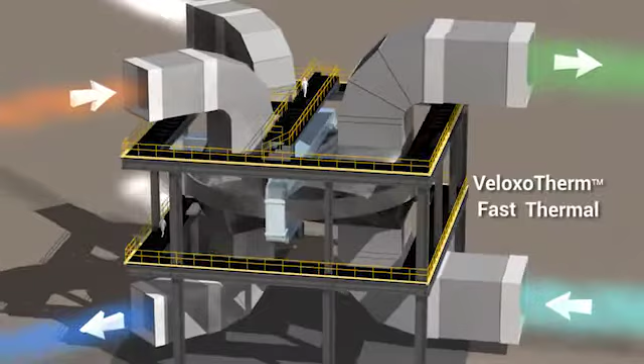Welcome to Carbon Capture in 60 Seconds, the most economically viable approach for separating CO2 from flue gas streams. The VeloxoTherm process is the world's first post-combustion CO2 capture process that uses structured adsorbents.

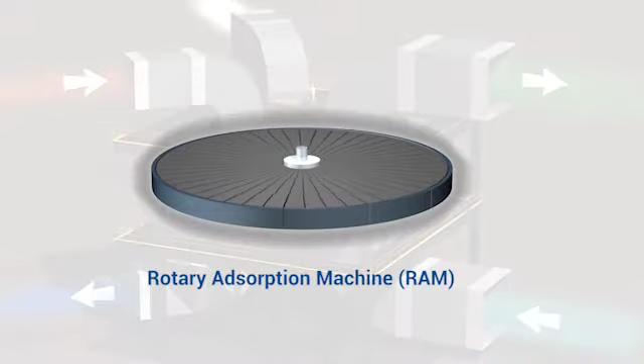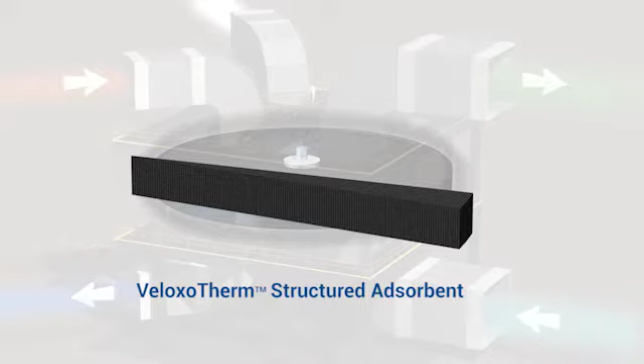At the heart of the VeloxoTherm process is the Rotary Adsorption Machine, or RAM, which functions in a similar manner to a regenerative air preheater. The RAM consists of a rotating assembly, or rotor, that contains the structured adsorbent. The rotor is divided into sectors by the rotary valve, which establishes separate flow paths for flue gas, steam, and air through each sector while minimizing gas leakage.

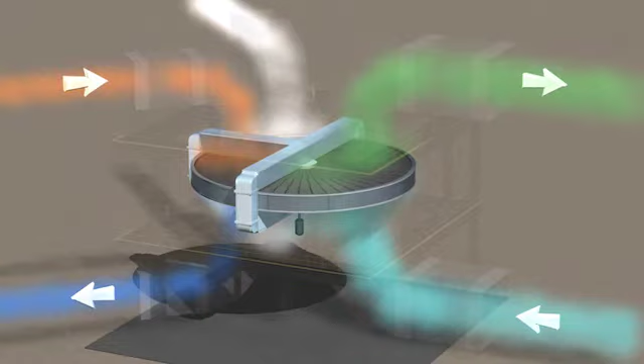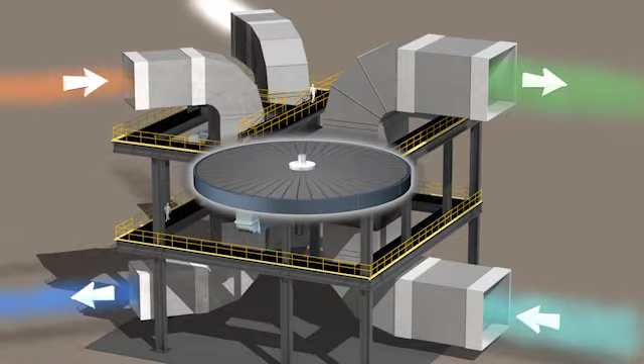The temperature swing adsorption, or TSA cycle, is established by the rotation of the structured adsorbent, which completes a full revolution in about 60 seconds. Now, let's look closely at the VeloxoTherm process, which consists of 3 basic steps.

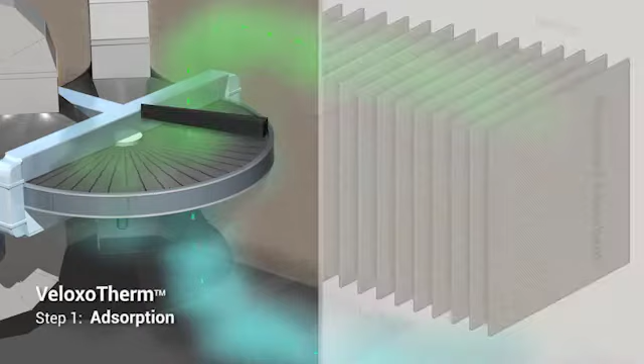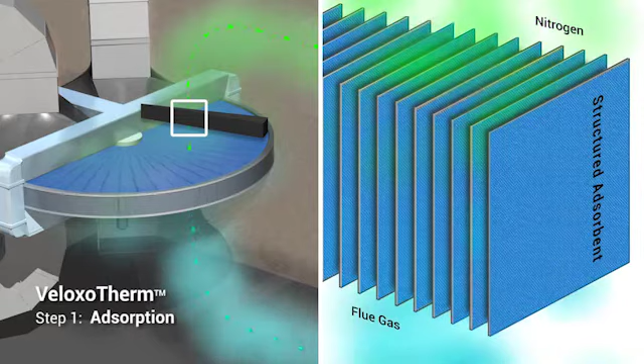The process begins with the adsorption step, where CO2 is removed from the flue gas stream. The flue gas enters the RAM and contacts the VeloxoTherm structured adsorbent. CO2 is adsorbed, while other gases pass through.

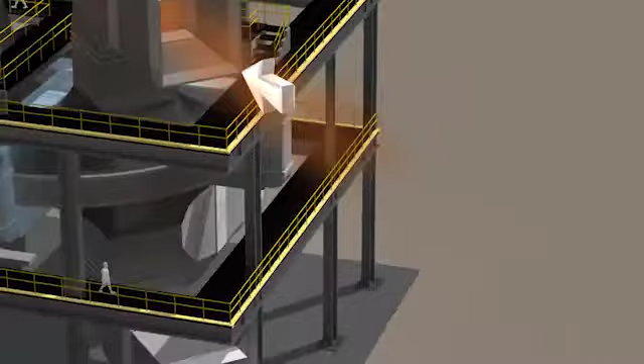Next is the regeneration step. After the structured adsorbent becomes saturated with CO2, it needs to be regenerated. Low-pressure steam is used to release the CO2 from the adsorbent. As the steam flows into the structured adsorbent, CO2 is released and exits the RAM with water vapor, which is readily condensed to yield a pure stream of CO2.

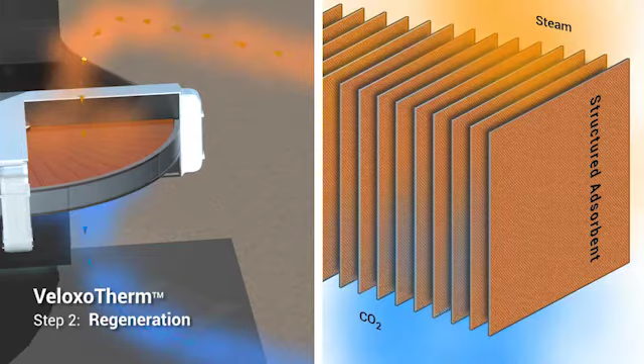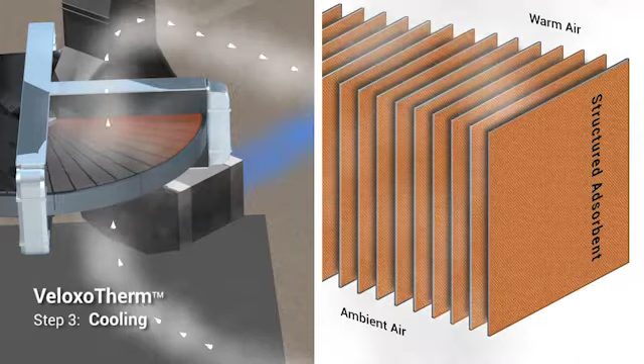The final step is the cooling step. After the CO2 has been released from the structured adsorbent, it needs to be cooled. Air is used to cool the structured adsorbent, preparing it for the adsorption step, and the process is started over again. 3 simple steps in just 60 seconds.

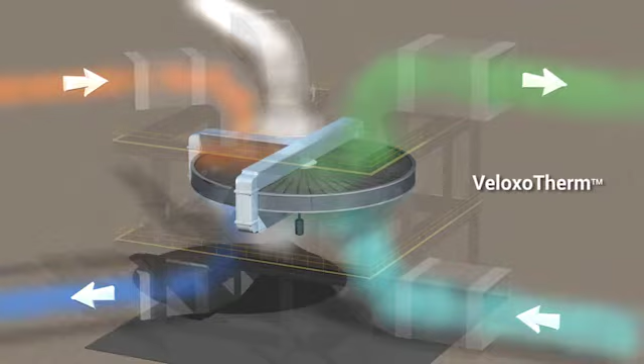The VeloxoTherm process is the lowest cost post-combustion CO2 capture process. Now, the economics make sense. Inventys: the next CO2 solution is actually a solid.